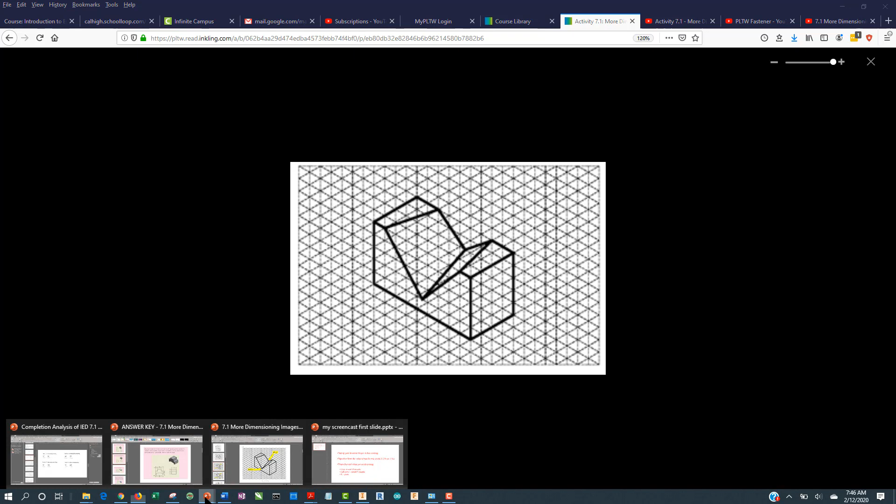And if you print it out and analyze it, you can convince yourself that those points occur 4.5 units over, which is halfway, and up 1. And in the back, it's again 4.5 units over and up 3. So if you print that out and start drawing very lightly for like the back, the hidden lines here for the corners, you can convince yourself that that's the case. So we'll use that as we make this particular part.

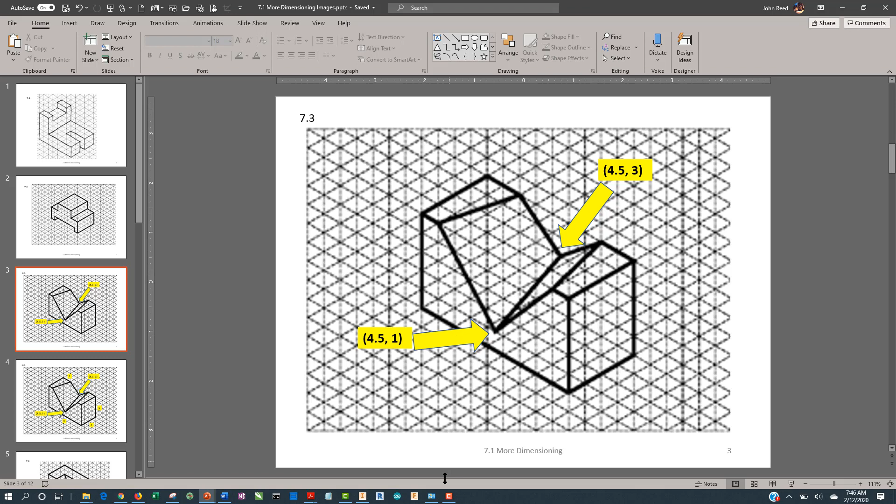The way we're going to do it is we're going to make a rectangular prism, and then, yeah, you'll see. Okay, width-wise, it's 9 squares times, and even though my PLTW says do this in metric, I want to do this in standard, so this is 0.25 inches. That's our grid. Tab over, and then our height is 1, 2, 3, 4, 5. 5 times 0.25. Enter.

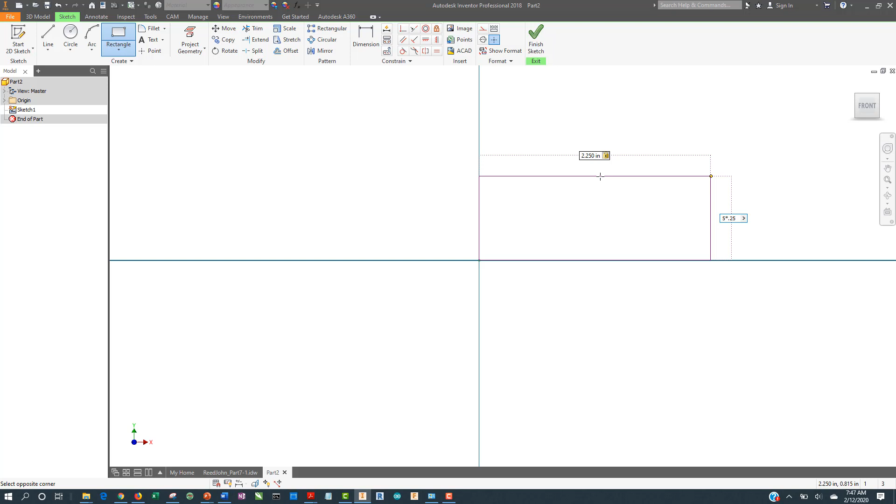Finish the sketch. So that's the front and the height, and we're going to extrude back for the depth, and I believe this is 4 units. 1, 2, 3, 4. So this will be 4 times 0.25. Okay. Now let's make a sketch and let's draw a V pattern here. So to do that,

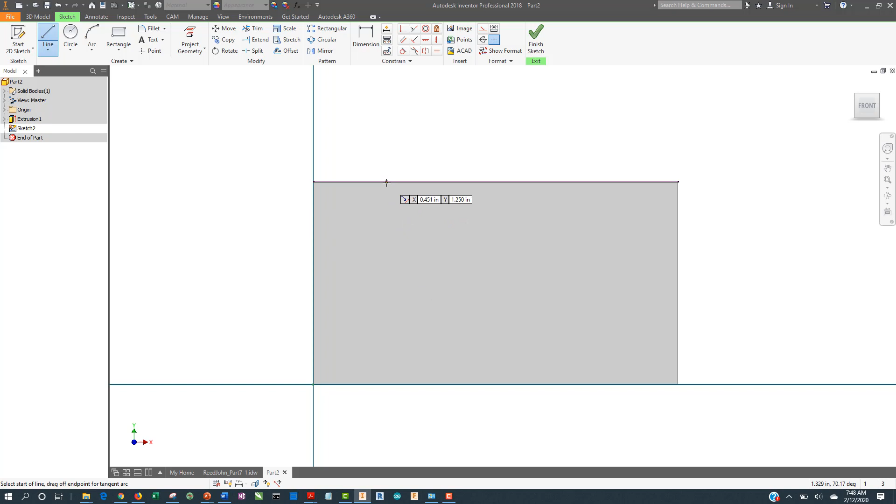I am going to use the line tool, and I'm going to make sure it's coincident with the top here. Click over, make sure it hits the top, click over, and then I'd like to make another line here at the top, because I guess it kind of automatically projected the geometry there. At any rate, let's go ahead and locate these corners.

So this is 1 unit over, so that would be 1 times 0.25. This would be the same, and I'm going to use a technique that I like to use when things are always going to be the same. Instead of putting the same thing in here, I can just come over and touch on this, and it'll give me D4, which is the variable for this particular measurement, but it'll keep those the same.

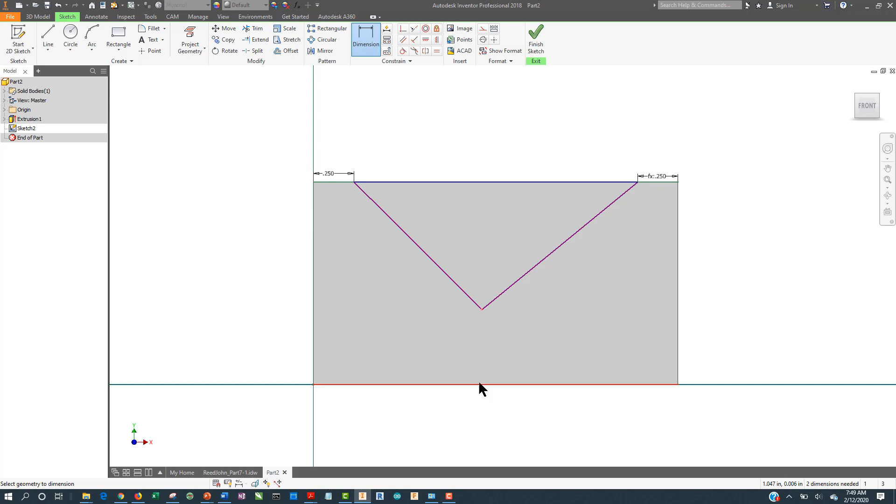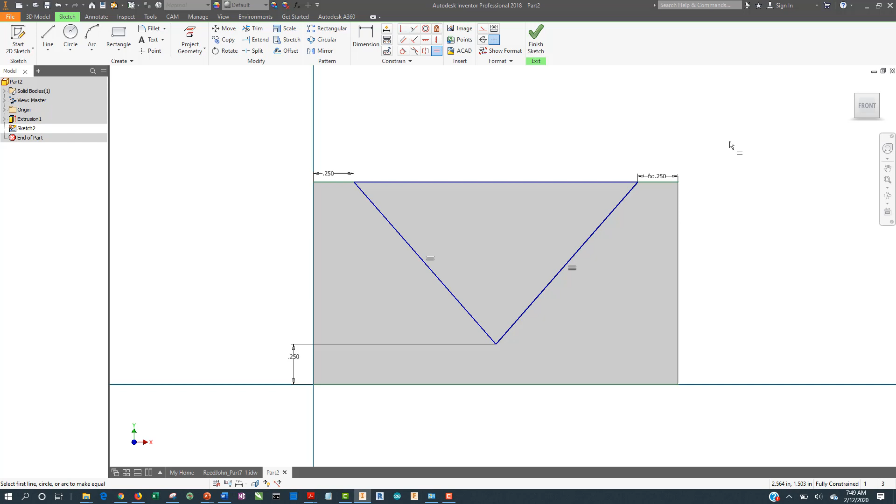Okay, now I know from here to here is 1 unit. No, it's not. It's 1 square, which is 1 times 0.25. Much better. Okay, now I've got 1 dimension remaining. I can now place the position of this with respect to the left, but what I like to do whenever I can is use geometric dimensioning, and I can instead make these equal, and that will do the same thing. Okay, so I finished the sketch, and I've got my sketch up here on the front.

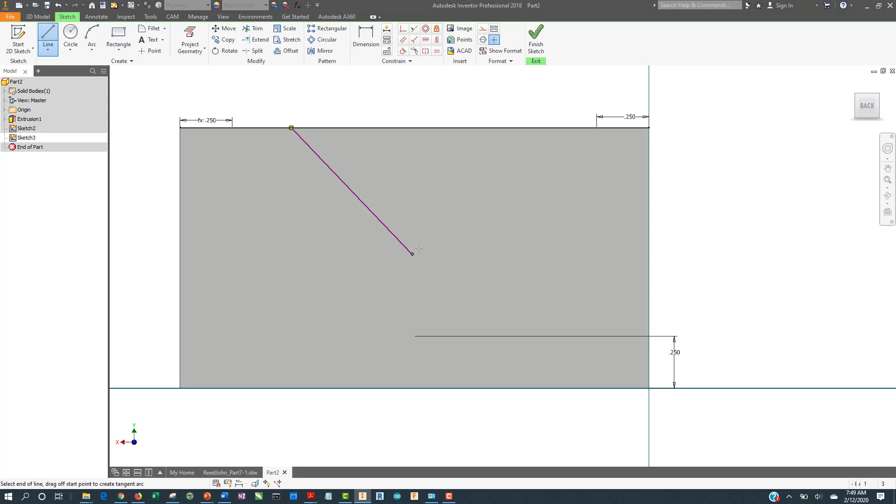Let's turn it around, and let's make a sketch on the back. And this is going to be the other V, so I'll draw my line here. So coincident there, coincident, and let's go ahead and make one there and start to dimension again. So from here to here is 2 times 0.25.

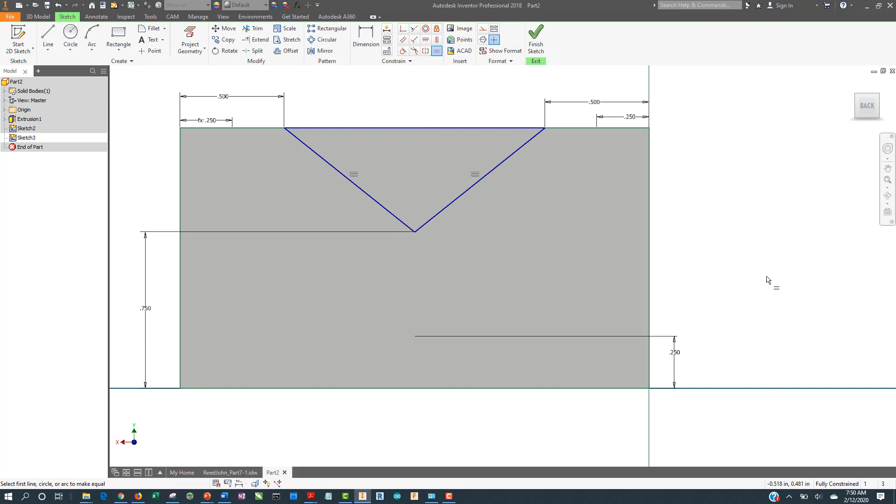And from here to here is 2 times 0.25. Actually, I didn't do my trick where I just touched the other one. Okay, we'll do that next time. And from here to here is 3 times 0.25. And I'm also going to use the equal method geometric constraint for there and there. And I'm fully constrained and I'm okay.

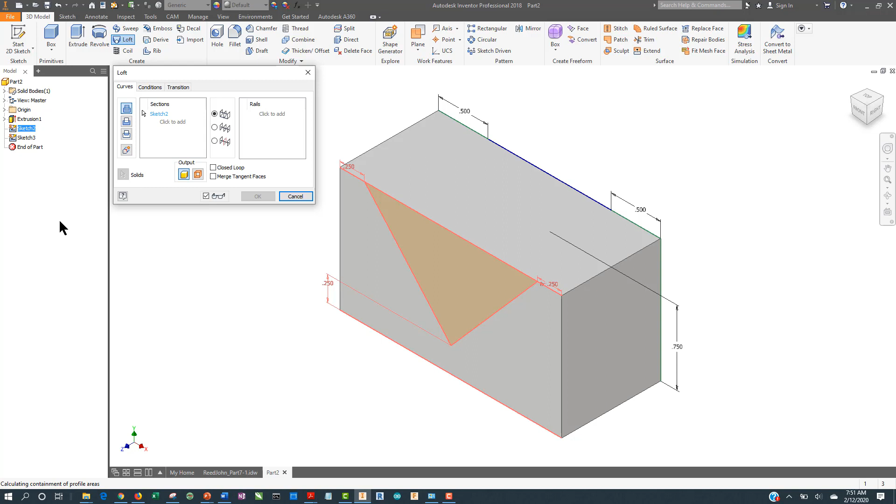So this is one of the few cases in which it's okay to have multiple sketches in your browser. And we'll use the loft command. We're going to do a loft cut between these two. So loft, this can be a little tricky. So I'm going to select that, and then I can select that sketch, and it looks like it grabbed the region of the triangle. So if I turn around and I click to add, and then I click the other sketch in the browser and go over and click it there, I think I've grabbed both of them.

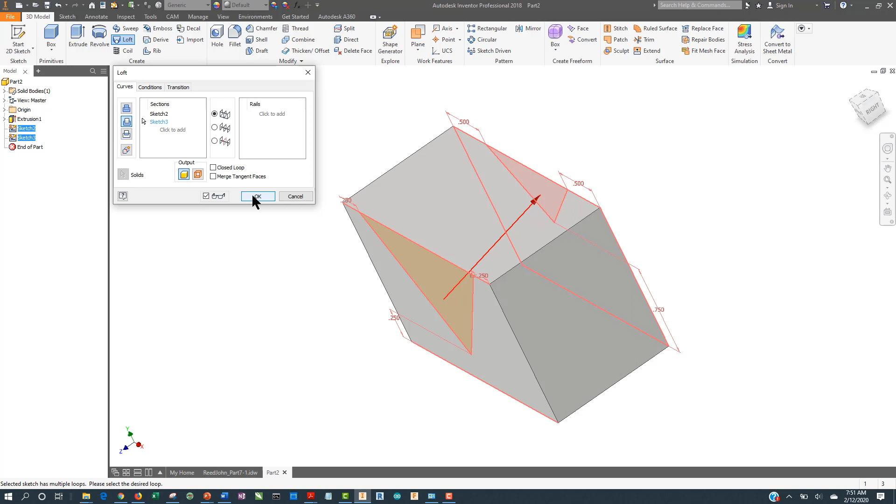So I want to come over here to cut, and you can see the little arrow, and it cuts it. That can be tricky. So I think that's the part that we want to make. So let's see what its volume is. And its volume is 2.240. So that should be the part you're going after for this particular part.